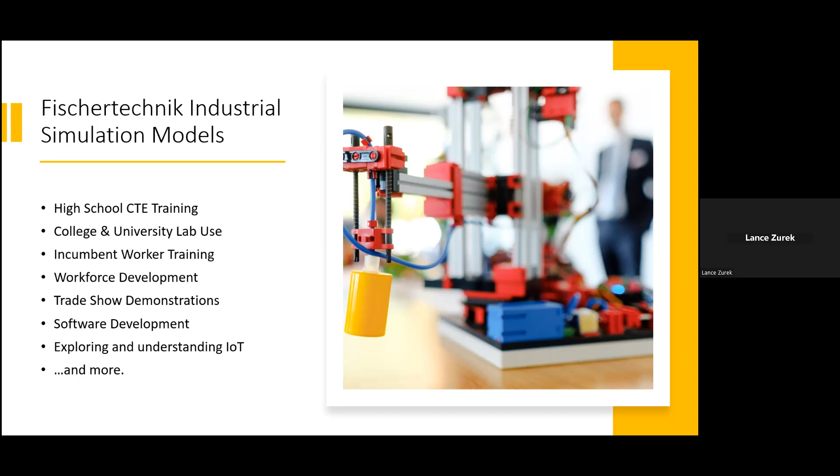And we're going to start off by considering the skills gap. Now, if you've attended any of our other fischertechnik education webinars, you've probably heard me discuss the importance of STEM education. STEM, of course, is an acronym which stands for science, technology, engineering, and mathematics. And at this point, it should really go without saying that STEM education has been perhaps the most discussed topic in education over the last decade.

Now, as most of us are aware, the push for developing STEM skills in students is in large part to help best prepare them to take their place in the modern workforce. Not so long ago, when our parents or even our grandparents were entering the workforce, employers in areas such as manufacturing might have been satisfied with hiring workers who could demonstrate good motor skills and a solid work ethic.

But as manufacturing has become more and more dependent upon automated processes and robotic control, employers now desperately need individuals who have a background in areas like mechatronics, industrial electricity, mechanical components, and programming PLCs.

And as it ties in directly with the solutions that we're going to be looking at in this presentation, let's consider that last skill area I just touched upon, that of being a PLC programmer.

Well, first off, for anyone who may not be familiar, let me explain exactly what a PLC is. The term PLC is an acronym, the letters of which stand for Programmable Logic Controller. Essentially, a Programmable Logic Controller, or PLC, is a very specialized computer used to control the types of machines and automated processes that are typically found in an industrial setting, such as an automated manufacturing plant.

Now, as the world of manufacturing becomes increasingly dependent upon these automated control systems, the need for workers skilled in the programming of systems like this grows exponentially.

And to get a pretty clear idea of just how highly prized these kinds of programming skills are, I'm going to give you some salary figures for PLC programmers as quoted from the job search website, Neuvoo.com. Quote, the average PLC programmer's salary in the USA is $78,000 per year or $40 per hour.

Entry-level positions start at $43,924 per year, while most experienced workers make up to $132,600 per year, end quote.

Now, at the time that I was preparing the original version of this webinar, I took a look at the listing of current job openings for PLC programmers on Neuvoo.com, and this was back in 2020. The listings at that time showed 15 different positions being advertised with salaries of over $75,000, and two of which even listed salaries of $195,000 per year.

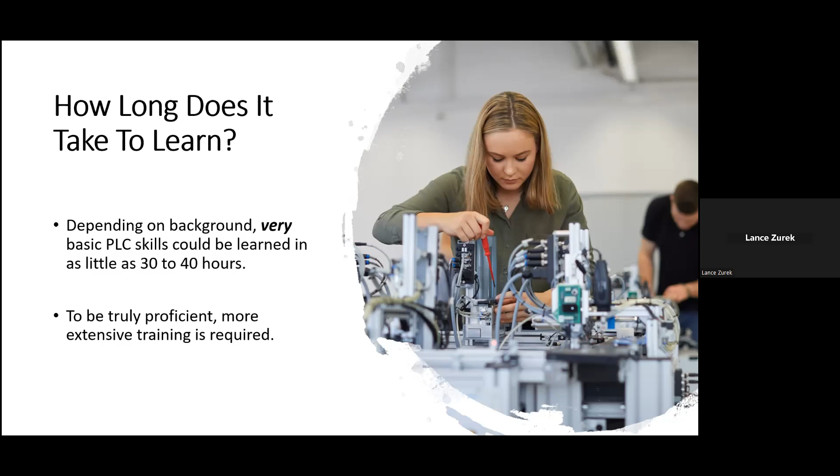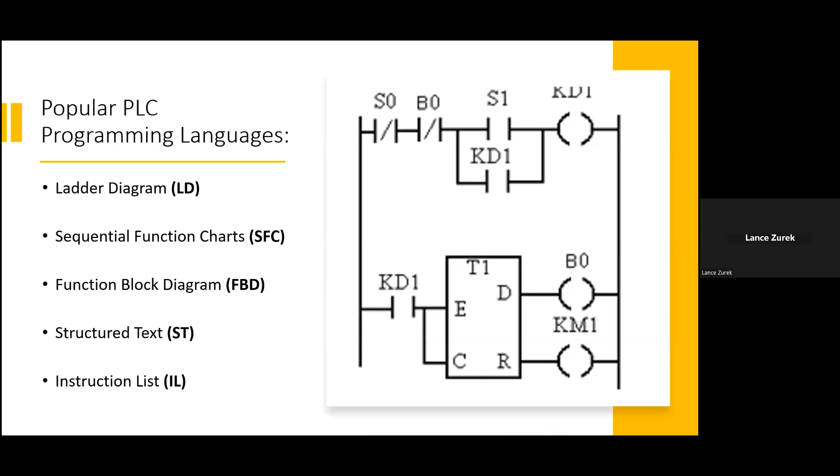But of course, to become truly proficient in all 5 of the most widely used PLC programming languages, which you see listed on the screen right now, as well as learning how to efficiently troubleshoot and address errors in judgment and equipment breakdowns, more training, of course, would be required.

Now, once again, while many students can learn PLC programming skills in a college lab setting, there are, of course, many other options available, things like high school CTE, career and technical education training programs. There's also adult continuing ed programs, vocational training, technical training and trade schools, and employer-sponsored incumbent worker training programs.

Now, that all being said, the question that still arises for the educator, whether you're in the university or the vocational school setting, is how do you teach PLC programming in a way that makes it engaging and relevant to the student, whatever their background?

How do you get away from the dryness of textbooks and video presentations and instead make it realistic and hands on? But there are other areas of focus beyond programming that also need solutions for demonstrating, exploring, and understanding different aspects of automation and control systems.

Now, it could be that it's a company involved in creating or marketing a new type of software based solution that's looking for ways to make more tangible processes which might otherwise be perceived as abstract, or to test it out in a more realistic fashion. Maybe it's a manufacturer looking for ways to better visualize the production process for workers or stakeholders as they prepare to build a new factory. Or it could even be a company looking for an engaging way to demonstrate their services or solutions in a public setting, such as a trade show.

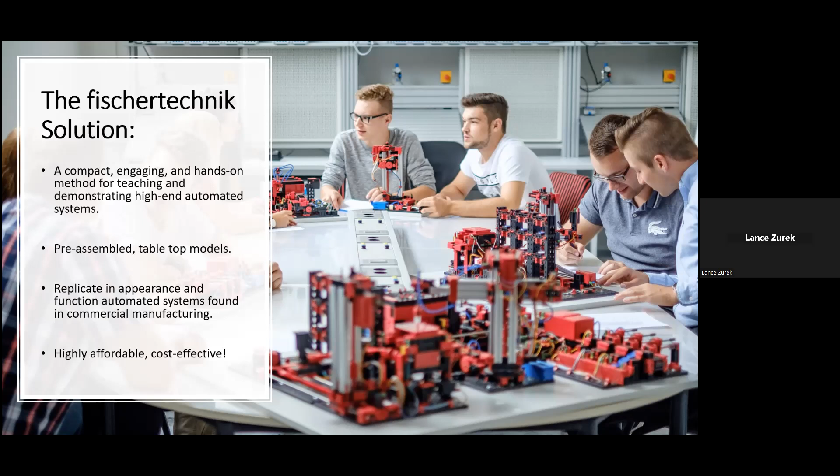The line consists of a series of pre-assembled small scale models which are designed to replicate in both appearance and in function various automated robotic machines and systems commonly used in commercial manufacturing. But before we begin to look at each of these models, I'm going to provide you with a little bit of a background on fischertechnik.

Fischertechnik has been creating tools for teaching students of all ages how technology works for over 50 years, all based around their unique building system. Now, what makes this system unique is that unlike other popular construction systems where the components are designed to simply stack, with the fischertechnik system, it was created with more of an engineering mindset.

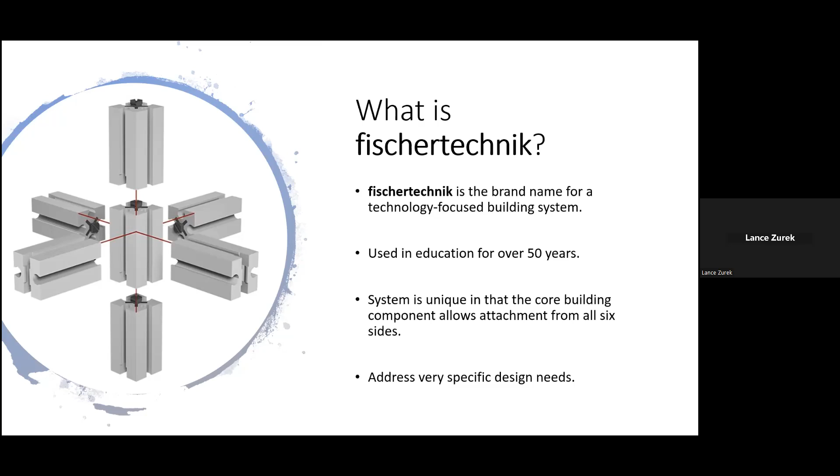The core building block in this fischertechnik system is designed to enable attachment from all six sides, like you see in the graphic on the screen. And because of this, it allows for almost limitless design possibilities. Many of the parts are designed to slide together and lock in place using a tongue and groove assembly method. And the hundreds of different parts available will also help to address very specific design needs.

Now, besides fischertechnik, Mr. Fischer was the inventor of synchronized flash photography, and this was back in 1949. And he was also the creator of the expanding nylon wall plug, which is commonly used in conjunction with a screw or a bolt to help anchor heavy objects to walls.

His company, the Fischer Group, employs thousands of workers worldwide, producing many variations of fastening devices used in building construction. They also produce numerous components used in automobile assembly, as well as providing consulting services to companies who wish to employ state-of-the-art manufacturing processes. Now, once again, the focus of fischertechnik sets, and that's whether we're talking about those sets intended for retail market or those used for the classroom.

The focus of these sets has always been on helping people to understand how technology works. Many of the products offered by fischertechnik for the education sector are what we would refer to as subject-specific sets, for example, focusing on different STEM-related areas such as mechanics or pneumatics, robotics, renewable energy, or what have you.

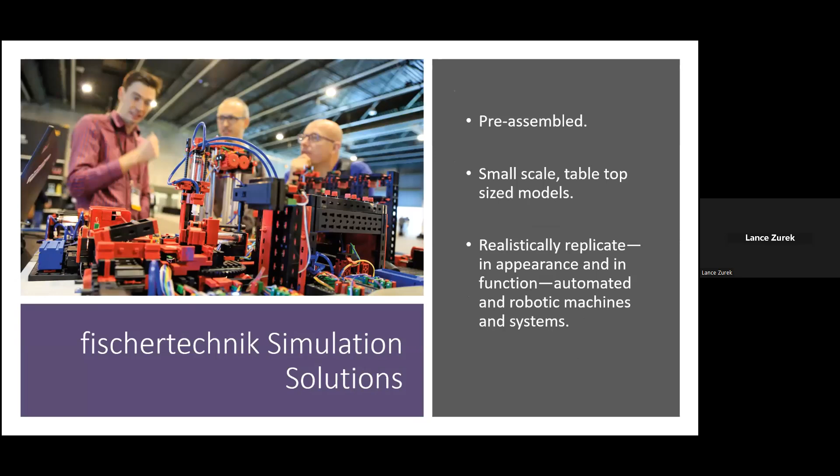Now, the line of fischertechnik simulation solutions, which of course are the focus of today's presentation, are something much different. The line consists not of kits, but again, of a series of pre-assembled small-scale models which replicate in appearance and

function various automated robotic machines and systems. Some of the models that you will find in the fischertechnik simulation line include things like conveyor belts, punching machines, three-axis pick-and-place robotic arms, color sorting lines, and even Highbay warehouse storage systems. Now, besides these individual models, which focus on specific automated processes, fischertechnik also offers an integrated factory simulation model.

Now, this model consists of 4 individual workstations. In this case, it's going to be a vacuum gripper robot, a high-bay storage warehouse, a multi-processing station with an oven, and a sorting line with color detection, which are designed to all work together as one self-contained material cycle. And of course, we're going to look at that a little bit later.

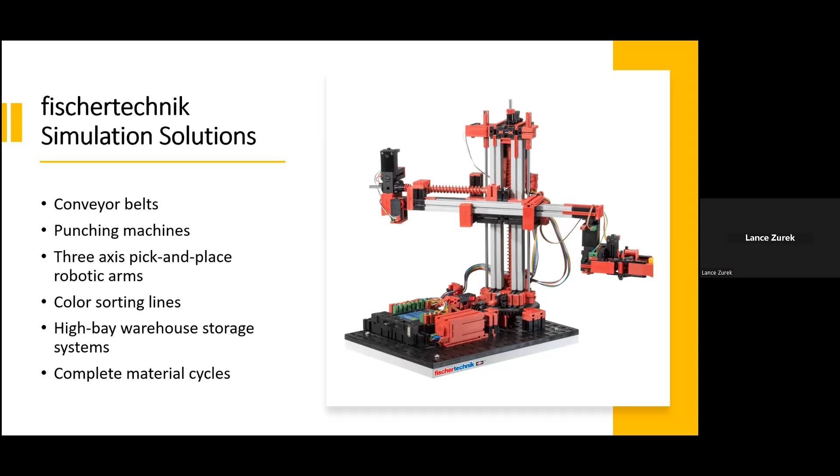Now, before we begin to look at the models in the simulation line in detail, I'm going to very briefly outline some of the advantages of using fischertechnik solutions. Now, I do apologize in advance, as a few of these things are points I've touched upon before, but in each case, I do think it's worth repeating.

First, fischertechnik simulation solutions allow educators to offer engaging, hands-on tools for teaching, exploring, and understanding various aspects of automation and programming. Now, this can be for understanding how automated systems work, or for having a tangible physical system to observe and work with in a programming or PLC-focused learning environment.

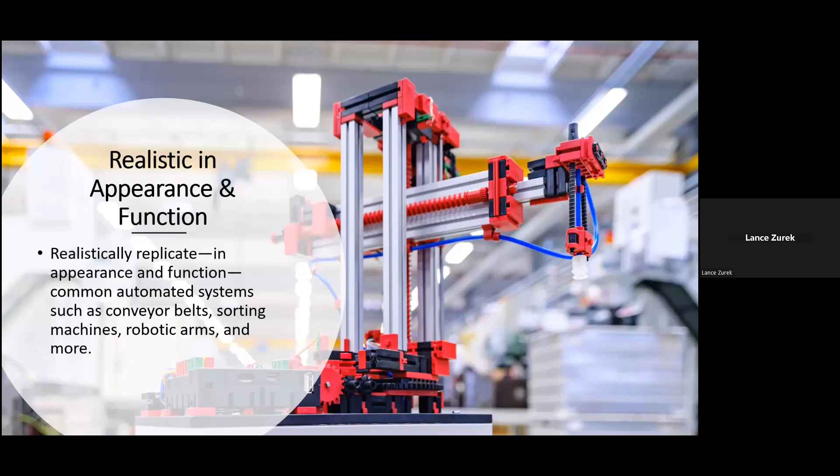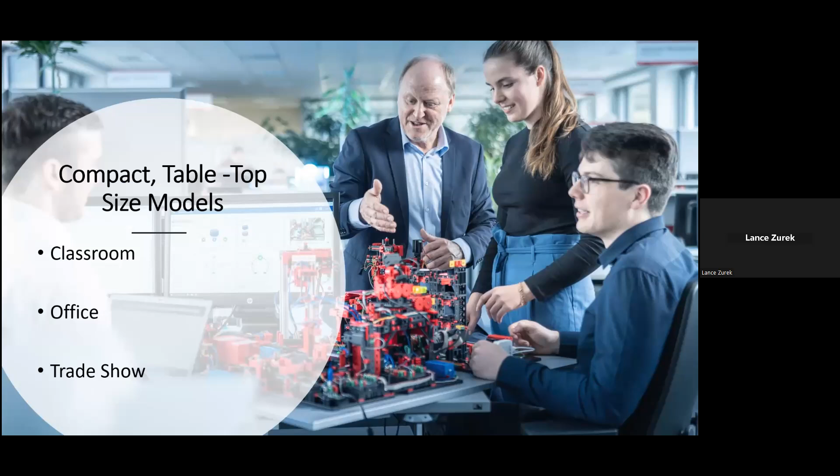The models are once again designed to realistically replicate, again in both appearance and in function, common automated systems, things such as conveyor belts, sorting machines, robotic arms, and much more. Because the models are compact and in most cases tabletop size, they are not only ideal for use in the classroom or in office demonstrations, but also for demonstrating software or other technology-based offerings in a trade show environment.

The next aspect is quality. Each fischertechnik simulation model is a hand-assembled, high-quality German-made product. Each of these models is available in a 24-volt version designed for use with industry-standard PLCs.

Now, it doesn't matter whether you prefer to use Allen Bradley controllers, Siemens controllers, or controllers from manufacturers such as Honeywell, Mitsubishi, General Electric. Of course, there are many others. In any of these cases, you can control these 24-volt versions of the models with the PLC you prefer.

Of course, this shouldn't be an issue, as these models are designed specifically for industrial users or for those teaching or exploring industrial processes involving PLC programming. I will say in advance, there are a couple options that do include some wiring and PLC, which we will discuss later in the presentation. But most of them will require that you provide that on your own.

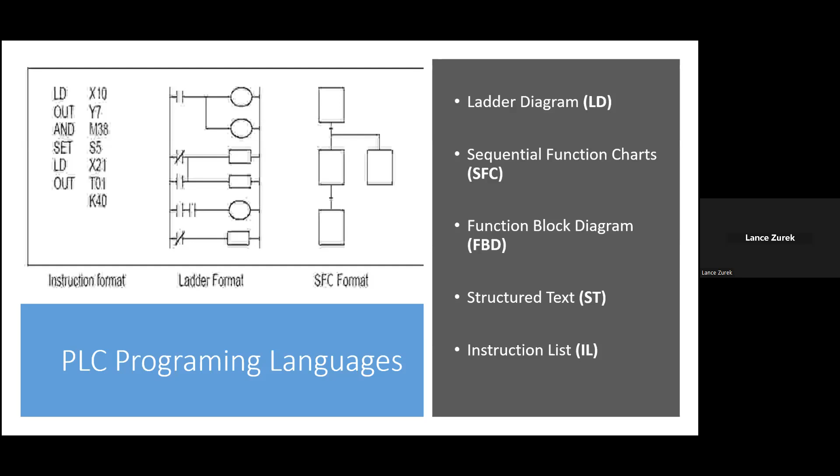Moving right along. In addition, for non-industrial users, or for those educators who aren't versed in or familiar with PLC programming, there are several models which are currently available in 9-volt versions. Now, these 9-volt versions ship pre-wired to fischertechnik's own proprietary robotic controller, which is called the Robotics TXT controller.

And each of these controllers is pre-programmed using fischertechnik's own RoboPro programming software. Now, with these 9-volt models, the only additional component required will be some power adapters, which we will mention as we get into each model. Otherwise, in most cases, these 9-volt models are essentially ready to use out of the box.

Moving along with our advantages. Now, if you're involved in demonstrating or exploring IoT, of course, which is also known as the Internet of Things, besides the fact that many end users we work with have adapted many of the models in the primary line of simulation and training solutions for IoT purposes, besides this, fischertechnik now also offers a special IoT-focused variation of the

factory simulation, which is designed specifically for exploring and understanding cloud-based control and what is often referred to as Factory 4.0. Now, in the case of these models, the model is designed to be both controlled and monitored from a special web-based dashboard. And of course, we're also going to discuss this in more detail in just a little bit.

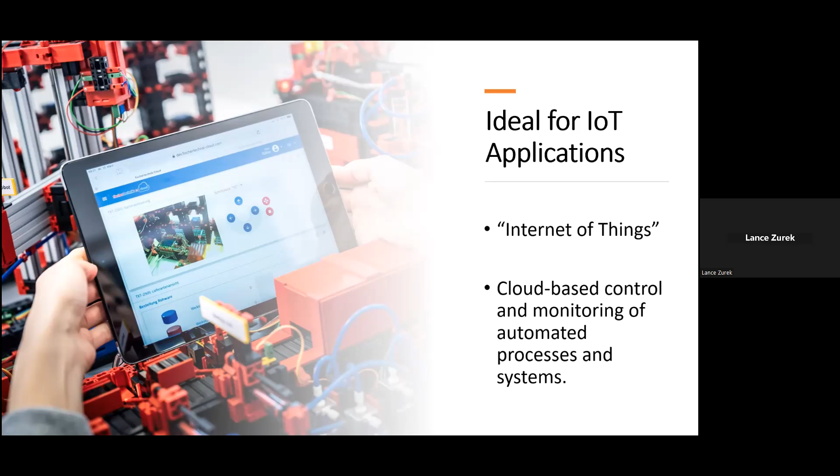Finally, fischertechnik simulation models are cost effective. Now, if you've had the opportunity to look into any of the other hardware-based industrial simulation options in the marketplace, you'll probably notice that the entry point for many of these products can easily be $30,000, $40,000, even much, much more. Fischertechnik simulation solutions, on the other hand, are available at just a fraction of that price, as well as, again, being compact, realistic, and high-quality learning and demonstration tools.

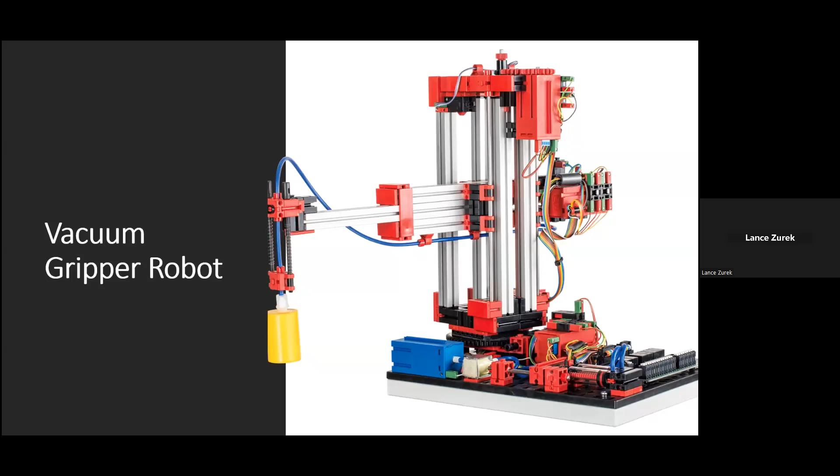So on that note, let's take a look at each of the models which are currently available. The first model we're going to look at is the vacuum gripper robot, which you see on your screen now.

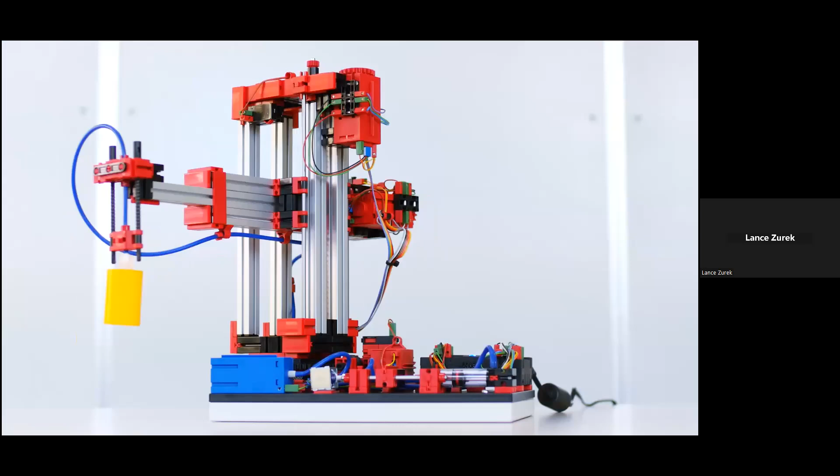Now, as you're going to see in this video, the vacuum gripper is a 3-axis robotic model with a vacuum gripping device. The model is designed to precisely pick up and position workpieces in 3-dimensional space. The model itself includes 3 encoder motors, 3 push-button limit switches, a vacuum suction device, a compressor, and a solenoid valve. The model's dimensions are approximately 9 by 19 by 15 inches, and it has a weight of just about 7 pounds.

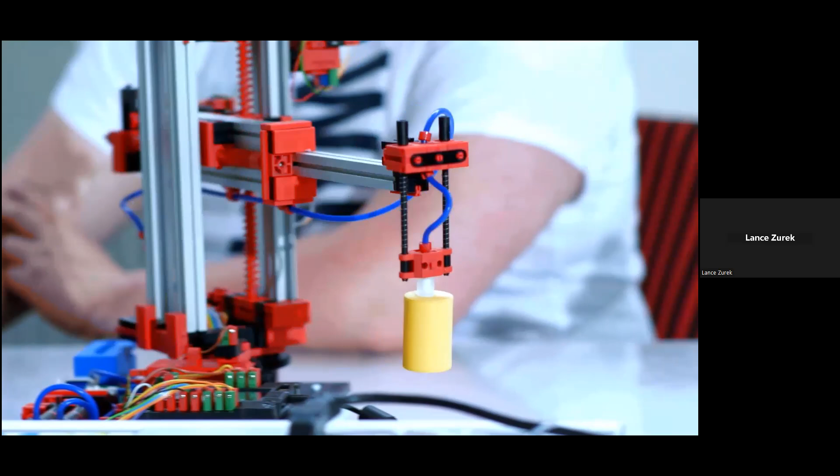The 24-volt version of this model, which is the only version available right now, as well as all of the first 5 24-volt models that we're going to be looking at today, each have a relay board for motor polarity reversal and both a multi-pin connector, which is 34 pins with a grid of 2.54 millimeters, as well as additional PCB terminals with push-in connections for all inputs and outputs. Again, the 24-volt version of this model, as well as all 24-volt versions, will require you, the end user, to provide the PLC and the program.

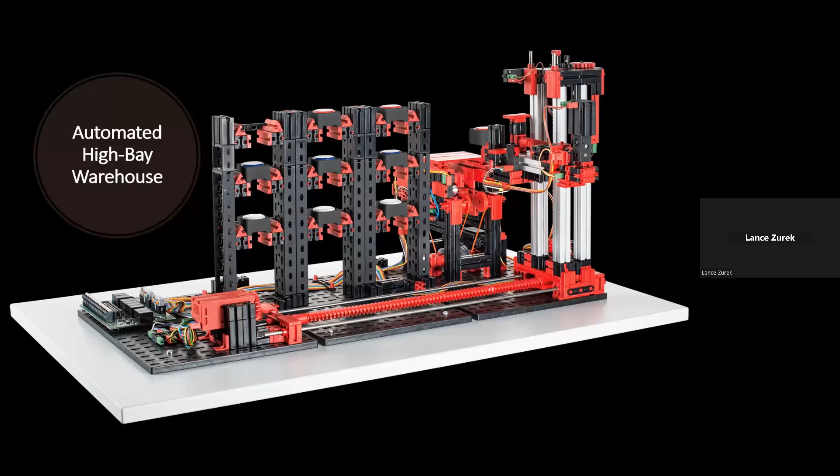And that was the vacuum gripper robot. Next, we're going to look at the automated High-Bay Warehouse.

Now, the model you're going to see in this video features a transfer station with a conveyor belt, along with a shelf stacking mechanism for storing and retrieving workpiece carrier trays, along with 9 individual storage spots. Components on this model include 2 encoder motors, 2 mini motors, 4 push-button limit switches, 2 photo transistors, 2 LED light barriers, along with a selection of different colored workpieces and carrier trays for each piece.

I will mention that this particular model is a favorite among educators that I've spoken with who are involved in teaching PLC programming. The reason for that is because it gives you so much to work with in regards to the precise movements of the picker mechanism, as well as the precision required to properly store and retrieve each of these workpieces, each step of which will require its own very specific coding.

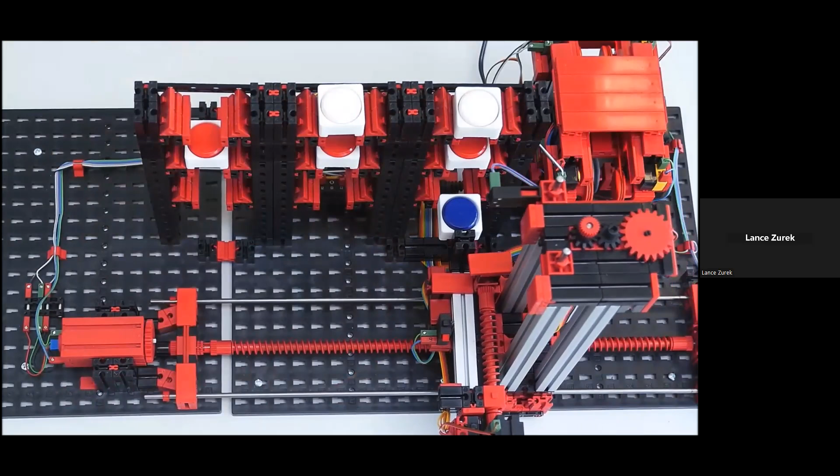Getting back to specs, the dimensions for this model are approximately 19 by 28.5 by 15 inches, and it has a weight of approximately 18 pounds. Again, this 24-volt version has a relay board for motor polarity reversal and both a multi-pin connector, 34 pins with a grid of 2.54 millimeters, as well as additional PCB terminals with push-in connections for all inputs and outputs.

Again, you will need to provide your own PLC and programming, and I will mention that there is a limited edition 9-volt version also available at this time, which is pre-wired to a pre-programmed robotics TXT controller, and in that case, 1 power adapter is required.

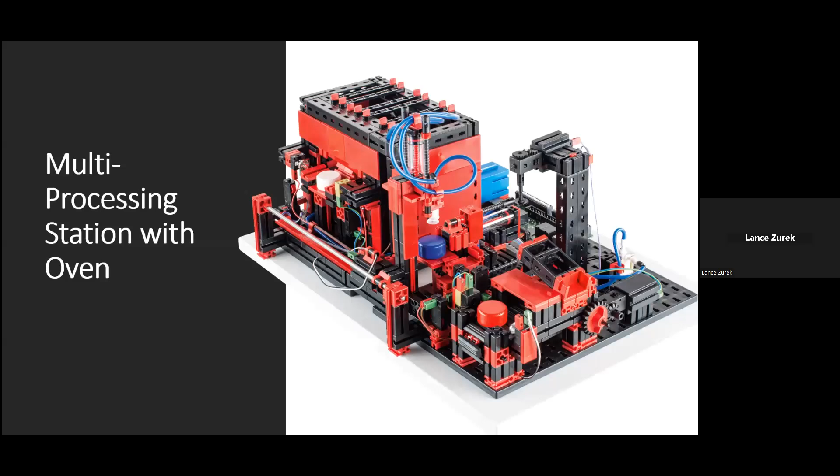The next model we will look at is the Multi-Processing Station with Oven. The model you're going to see here features a furnace simulation with a pneumatic sliding door. There's a downstream processing station with a pneumatic transfer unit that includes a vacuum gripper, a cutter with a rotary table, and a conveyor belt.

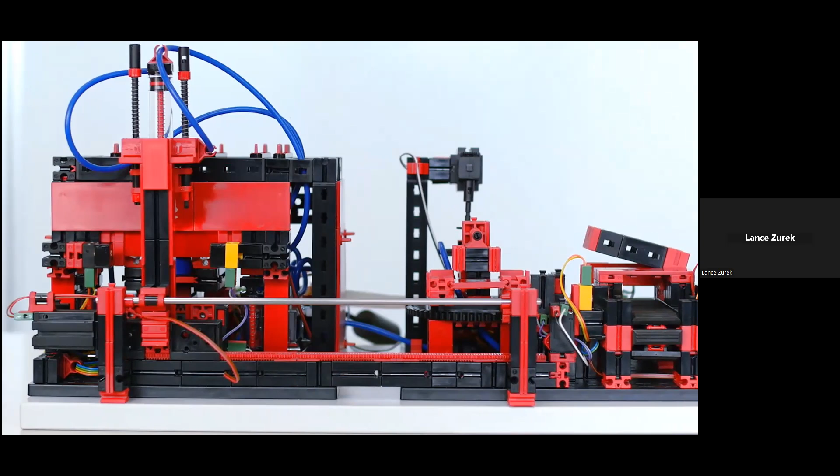Components on this model include 4 mini motors, 6 push-button limit switches, 2 photo transistors, 2 LED light barriers, 4 solenoid valves, and a compressor. The dimensions are approximately 20 by 14 by 12 inches, and it has a weight of just about 11 pounds.

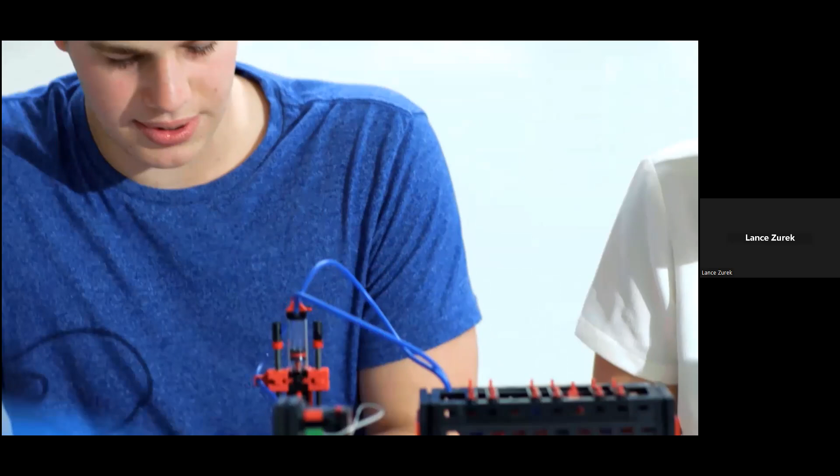Again, the standard version of the model is the 24-volt version for use with the PLC of your choice, with once again a relay board for motor polarity reversal, and both the multi-pin connector, 34 pins with a grid of 2.54 millimeters, as well as additional PCB terminals with push-in connections for all inputs and outputs. There is also a limited edition 9-volt version, which in this case comes connected to 2 robotics TXT controllers, so for this reason, 2 power adapters would be required.

We'll let this just play out for another couple seconds. And there's our payoff.

The next model we're going to look at is the sorting line with color detection. And we'll just turn that off—it always likes to go on.

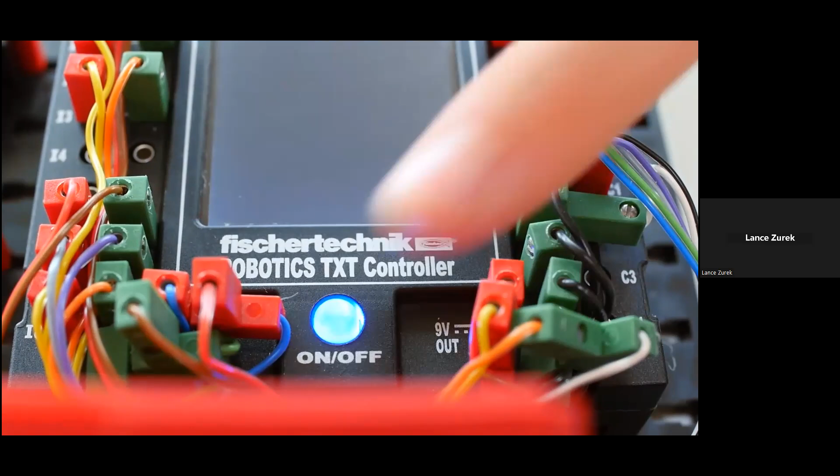This simulation features a system for detecting work pieces of different colors, and it sorts them via conveyor belt into 3 different storage bins. Components on this model include 2 mini motors, 5 phototransistors, 5 LED light barriers, 3 solenoid valves, a compressor, and an optical color sensor.

The dimensions for this model are approximately 20 by 14 by 12 inches, and it has a weight of just about 10 pounds. As with the models we've looked at earlier, the standard 24-volt version has a relay board for motor polarity reversal, and both the multi-pin connector—34 pins with a grid of 2.54 millimeters—as well as additional PCB terminals with push-in connections for all inputs and outputs.

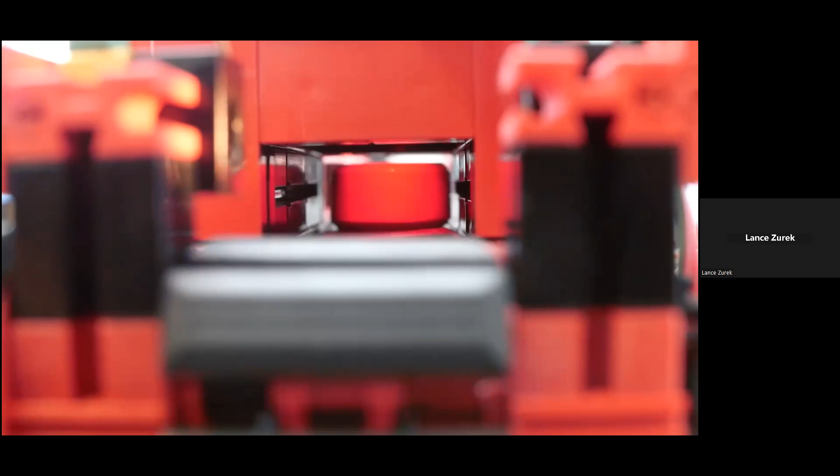Again, you do need to provide the PLC and the program. And there is a limited edition 9-volt version, which is currently available. It comes pre-wired to a pre-programmed TXT controller, and one 120-volt power adapter is required with that.

The next model we're going to look at is the factory simulation. This combines the 4 models we've just reviewed: the vacuum gripper robot, the automated High-Bay Warehouse, the multi-processing station with the oven, and the sorting line with color detection. It combines them all into one self-contained material cycle.

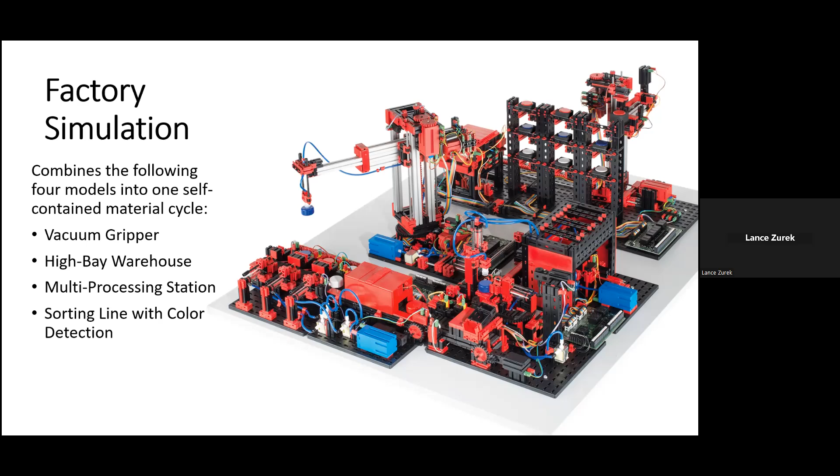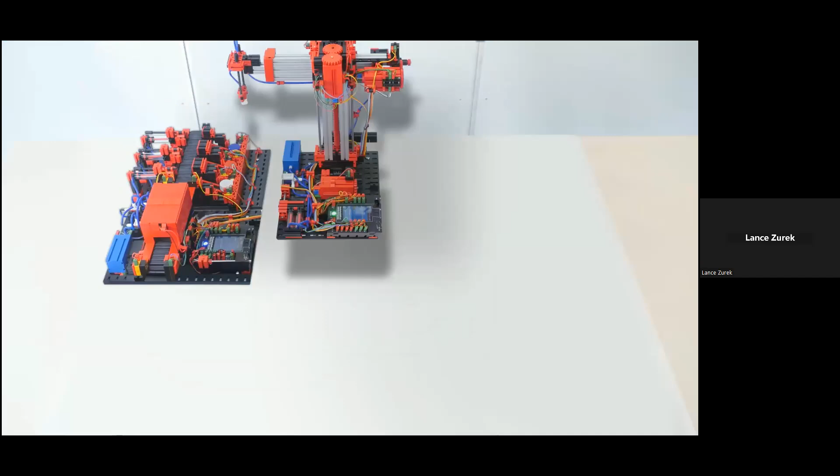The cycle works like this: work pieces are retrieved from the automated High-Bay Warehouse using the vacuum gripper robot, then moved to the multi-processing station with the oven. After the workpiece has been processed there, it's sorted by color in the sorting line with color detection, before again being moved by the vacuum gripper robot to the automated High-Bay Warehouse for storage once again.

Now, as we've already discussed the components of each of these models previously, I'm not going to belabor it by restating all those here. But what I do want to mention are the dimensions of this model as a whole—as it combines these 4 individual models into one cycle, it has a much larger total footprint.

In this case, it's approximately 39 by 31 by 16 inches, and it has a total weight of between 43 and 46 pounds, depending upon whether we're talking about the 24-volt version or the limited edition 9-volt version, which is still available. Due to these dimensions, and due to the fact that these models all ship pre-assembled, please note that this model will only be shipped flat as freight on a pallet.

I also want to point out that the factory simulation models—and that goes for these or a few that we're going to look at later in the presentation—are all in very high demand. So because of that, I would ask that you please anticipate a possible turnaround time of up to 3 weeks prior to any orders for this model leaving our warehouse.

A few other things to note. First, this is currently available again in the standard 24-volt version, and again in very limited quantities in the 9-volt version. In the instance of the 9-volt version, it's wired to 5 robotics TXT controllers, but because of the way that some of the controllers are daisy chained together, it's only going to require 3 120-volt power adapters.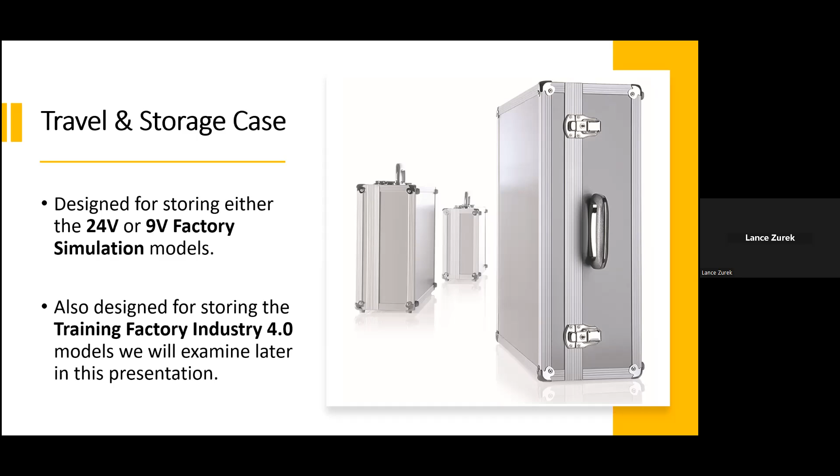The lower portion is lined with hard foam, and it's designed so that once the top of the travel case is removed, the model can remain in the bottom section of the case and be fully functional. The case itself has exterior dimensions of approximately 41 by 33 by 17 inches with a weight of approximately 53 pounds. Please do note that even when using the travel case, these models will still need to be shipped flat.

Moving along, the next model we're going to look at is a very basic conveyor belt. This is a transport belt with a length of 275 millimeters that is used to transport work pieces with a diameter of up to 29 millimeters. Multiple conveyors can easily be connected to increase the length of transport as you may desire.

Components on this model include an XS motor, a push-button limit switch, 2 phototransistors, and 2 LED light barriers. Dimensions of the model are approximately 14 by 10 by 4 inches, with a weight of just about 2 pounds. As before, the standard 24-volt variation includes a multi-pin connector, in this case a 26-pin connector with a 2.54 millimeter grid as shown here. For a limited time, we still offer a 9-volt version pre-wired to the robotics TXT controller, and one 120-volt power adapter is required for use with this one.

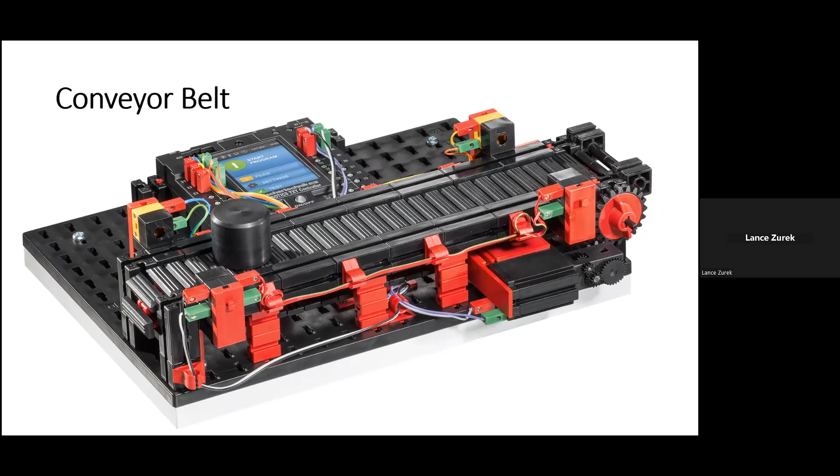The next model is a variation of the conveyor belt, which also includes a punching machine. This features essentially the same conveyor as we just looked at, except this time with the machining station built onto it. Components on this model include 2 XS motors, 2 push-button limit switches, 2 phototransistors, and 2 LED light barriers.

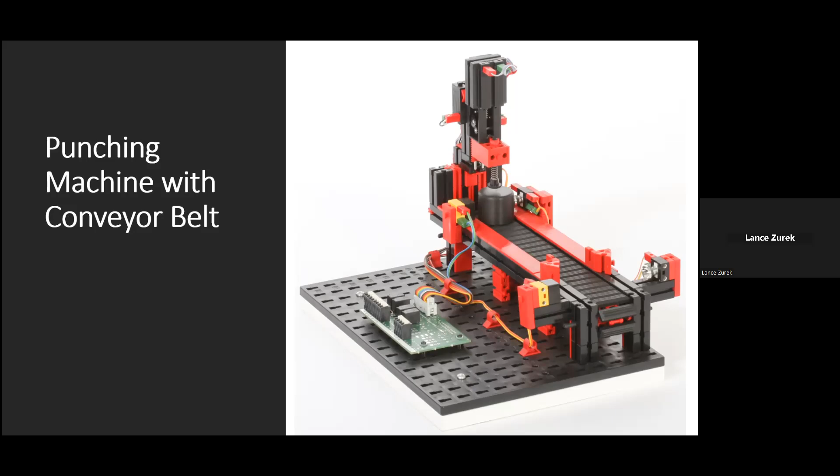Dimensions of the model are approximately 15 by 12 by 7.5 inches, with a weight of just about 3.5 pounds. Again, it's available in the standard 24-volt variation with the 26-pin connector, 2.54 millimeter grid as shown. For a limited time, we are also offering the 9-volt version wired to the robotics TXT controller, and 1 power adapter is required with this.

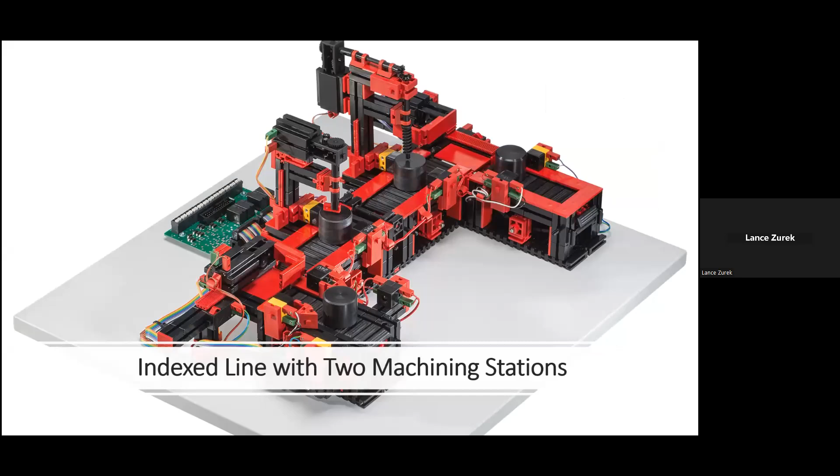The next model is the indexed line with 2 machining stations. This particular model features a U-shaped conveyor line consisting of a milling and a drilling station and 4 conveyor belt sections. Components on this model include the 4 conveyor belts, 8 XS motors, 4 push-button limit switches, 5 phototransistors, and 5 LED light barriers.

The dimensions of the model are approximately 19 by 18 by 11 inches, with a weight of just about 8 pounds. Again, it's available in both the standard 24-volt version with the 26-pin connector and 2.54 millimeter grid for use with the PLC and programming of your choice, and in a limited release 9-volt version wired to the pre-programmed robotics TXT controller, requiring 1 power adapter.

The next model we're going to look at is a variation on the idea of a pick-and-place robot, which is the 3D or 3-axis robot. The 3-axis robot has gripping forceps, which it uses to help it quickly and precisely position the workpieces it picks up in 3-dimensional space. The degrees of freedom for the robot are as follows.

Axis 1 can turn 180 degrees. Axis 2 can move forward or backwards 90 millimeters, and Axis 3 can raise or lower 150 millimeters. Components on this model include 2 XS motors, 2 encoder motors, and 4 push-button limit switches. Dimensions of the model as a whole are approximately 19 by 16 by 9 inches, with a weight of just about 6 pounds.

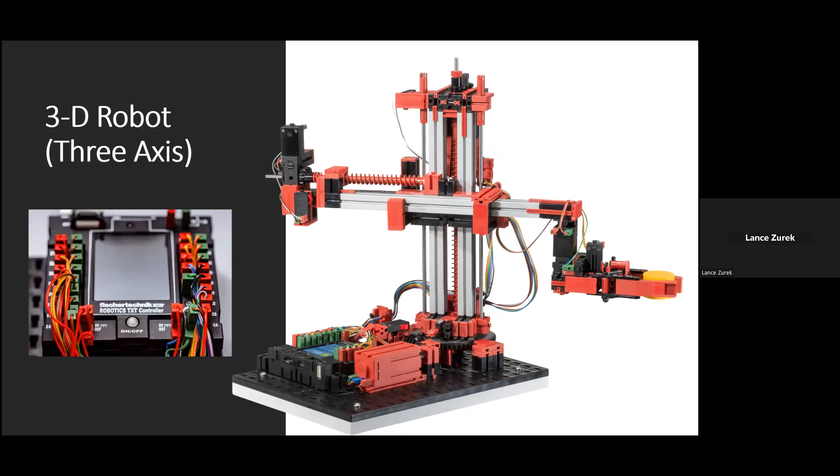Again, it comes in either the 24-volt version with the 26-pin connector and 2.54 millimeter grid, designed for use with PLC and programming of your choice, or in the 9-volt version, which in this case is not a limited availability model, but is a standard model. This comes pre-wired to the pre-programmed robotics TXT controller, and it requires one 120-volt power adapter.

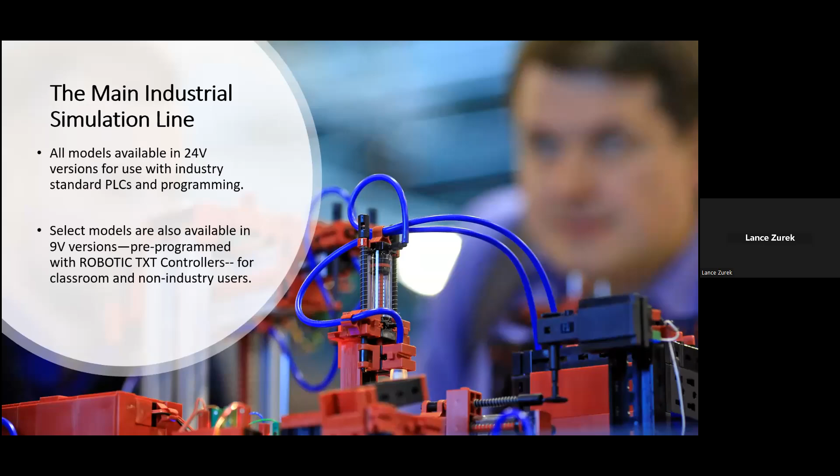That concludes our look at the first 9 variations of simulation models. The next pair of simulation models are designed to focus specifically on the area of IoT and are designed for demonstrating and teaching about cloud-based monitoring and control. These models go by the name of Training Factory Industry 4.0, which are available in both the 24-volt version for use with PLC and also a 9-volt variation for classroom and demonstration purposes.

These models have been designed to help address how the recent changes in industrial production, driven by digitization, have created a need for stronger networking and more relevant information on all production levels. With this Industry 4.0 update of the existing factory simulation model, which we saw earlier, such digitization activities can be simulated, learned, and applied on a small scale before they're implemented on a larger scale.

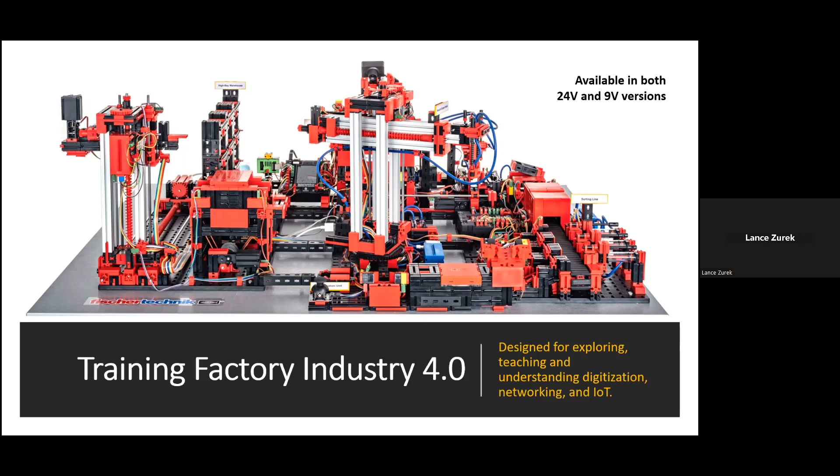As the following video showcasing the 24-volt version of this model provides a nicely narrated overview of just how the factory works, I'm going to step back for a moment and allow you to watch and listen to the narrator.

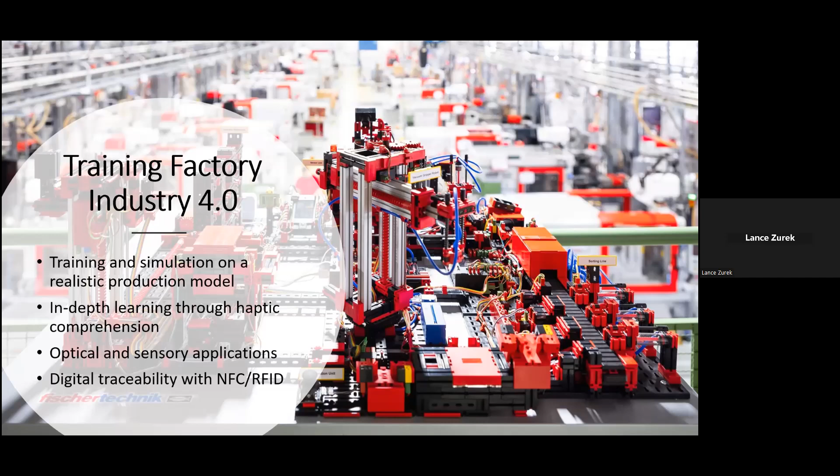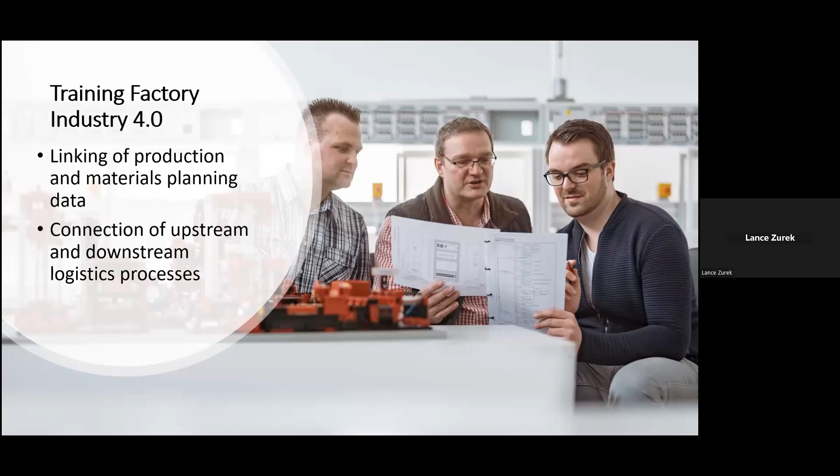First off, the following topics can all be addressed with the fischertechnik Training Factory Industry 4.0: training and simulation on a realistic production model, in-depth learning through haptic comprehension, optical and sensory applications, digital traceability with NFC/RFID technology, customized production in lot size 1, integrated cloud connection and control via smart devices.

Using and operating dashboards, web-based remote maintenance, linking of production and materials planning data, and the connection of upstream and downstream logistics processes. Now, as you just saw, the model incorporates many features not found in the models that we previously discussed, most notably the use of the cloud-based dashboard for monitoring and controlling the model.

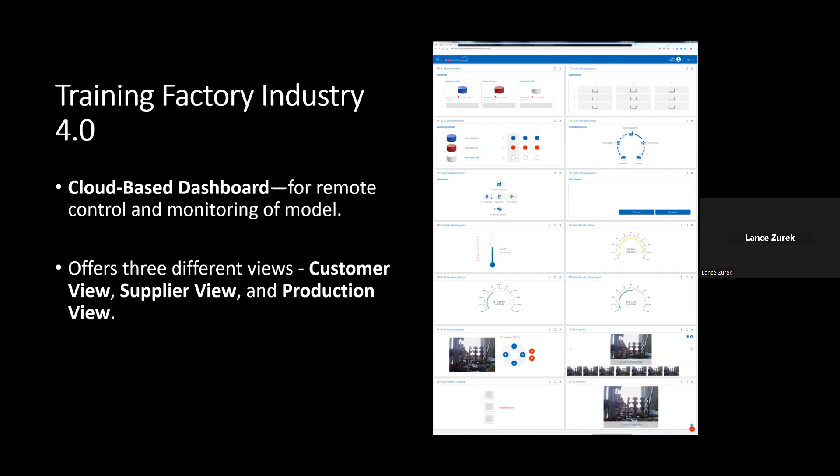Now, some other examples would be the camera that's used for visually monitoring the factory functions from the cloud-based dashboard, and also the environmental sensor, which collects data on variables such as temperature, air quality, humidity, and air pressure.

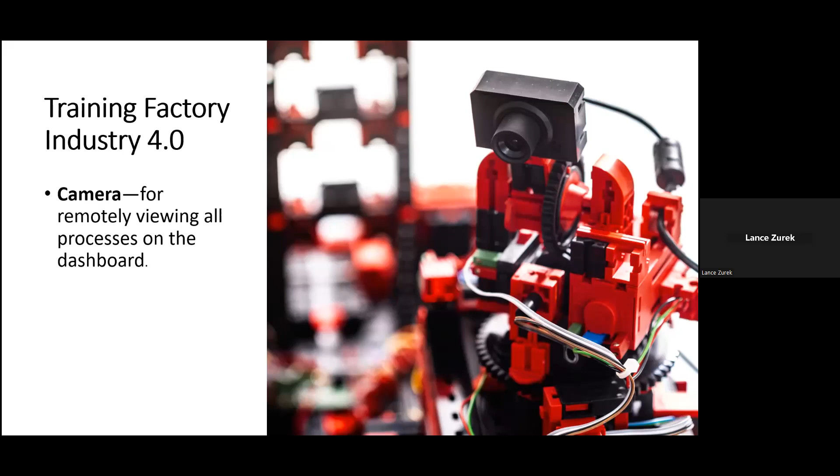The use of NFC chips in each individual workpiece, each of which has a unique identification number, enables the positions of each workpiece in the work cycle to be mapped. And also the use of MQTT, message queuing telemetry transport, that allows the network TXT controllers to communicate with one another. Now, as there are two variations of the model, let's go over what makes them different aside from the voltage requirements.

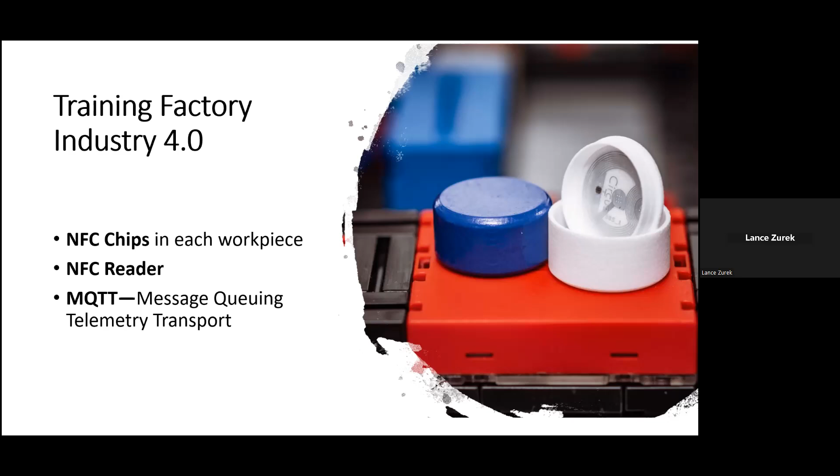And we're going to begin by focusing on the 24-volt version and what makes it unique. First off, it is a bit of a hybrid in that while requiring a PLC for operation and control, it does also incorporate one fischertechnik Robotics TXT controller.

And in this case, the TXT controller serves as the MQTT broker and interface to the fischertechnik cloud-based dashboard. Communication between the PLC and the TXT controller is carried out using an IoT Gateway via OPC UA. OPC UA, also known as OPC Unified Architecture, is of course a standard for exchanging data across different platforms.

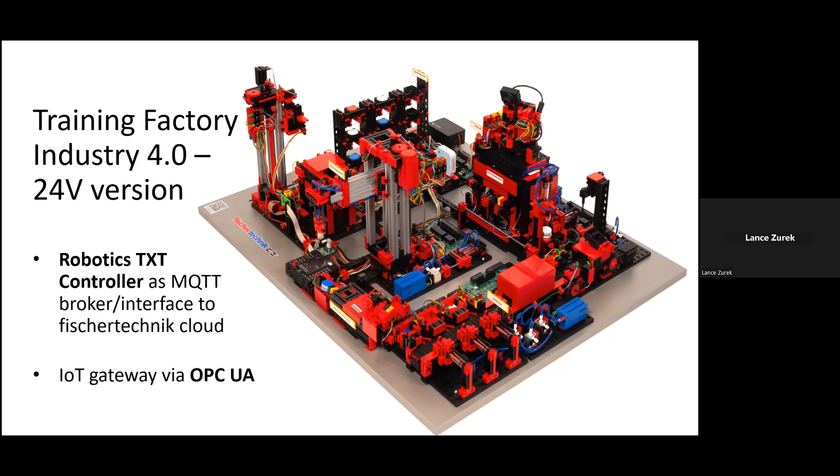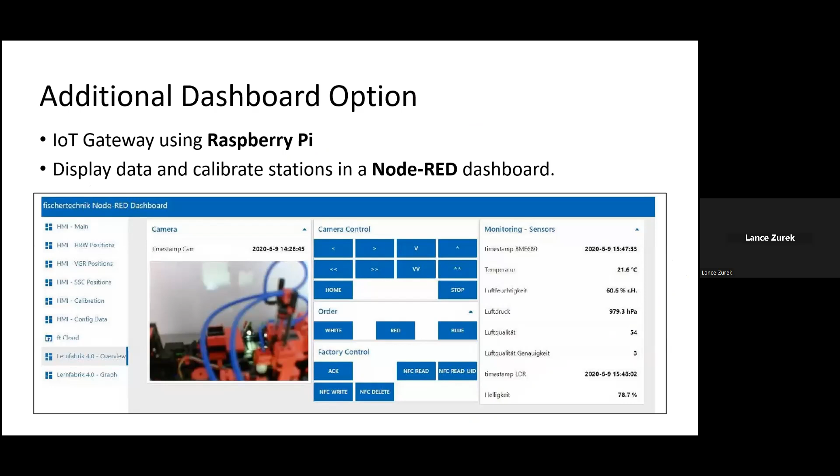Now, in addition to the TXT controller used here, there is also an IoT gateway using Raspberry Pi with Node-RED. And this allows the option for not only presenting and using data on a dashboard in the fischertechnik cloud, but also being able to display data and calibrate the stations of the factory in a Node-RED dashboard.

The model also incorporates newly developed 24-volt adapter boards to interface with the PLC, and these do ship as part of the assembled training factory and are connected to the PLC via terminals.

Now, among other things, the latest generation of adapter boards allows the speed of the encoder motors to be controlled via PWM, or pulse width modulation. And they also have push-pull output stages for photo transistors and for buttons.

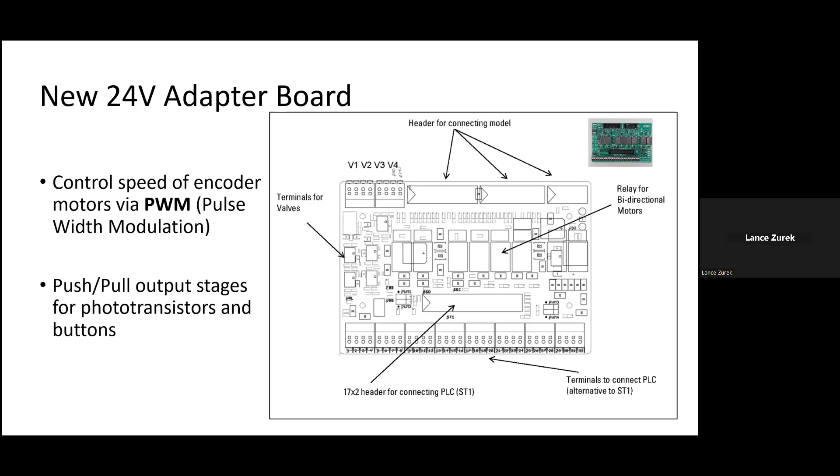Finally, one of the most important new features: unlike any of the previous 24-volt models that we discussed today, the new 24-volt Training Factory Industry 4.0 also includes access to a special sample program.

In this case, the sample program was designed to be in structured text format, ST, and it was created based upon a Siemens S7 1500 PLC. And this is, of course, available for download on GitHub.

Now, as the new training factory can also be controlled with other PLC models and brands, you can easily make some adjustments using the sample program, and source code for all of this is available for download as well from GitHub.

Now, as with the first of the 24-volt models, we looked at the Training Factory Industry 4.0 model has a relay board for motor polarity reversal in both the multi-pin connector, in this case it's the 34 pins with a grid of 2.54 millimeters, along with PCB terminals with push-in connections for all inputs and outputs.

And all of this information and much more is included in the 152-page PDF manual, which can be downloaded from the fischertechnik website, from our own website, or if you'd like a copy, you can email me. I'll give you information on that at the end, and I'd be happy to send you a copy as well.

Now, moving along to the 9-volt version, in this case, the control is facilitated through the use of 6 robotics TXT controllers. Now, unlike all the other 9-volt versions that we looked at today, this one is programmed not using the RoboPro software, but instead using C, C++.

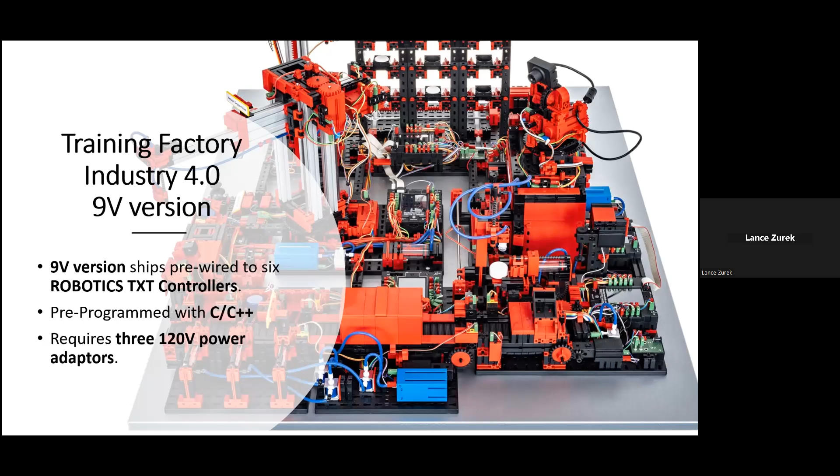The dimensions for these models are approximately 39 by 31 by 16 inches, with a total weight of approximately 51 to 53 pounds, depending on the version. As with the two factory simulation models discussed previously, we recommend the optional travel case to help protect your model during transport or storage.

That is the Training Factory Industry 4.0 model, now available in both 9-volt and 24-volt variations. So, you might be wondering, how much do these models cost? We're going to take a quick review of each option I've discussed, along with the pricing for each.

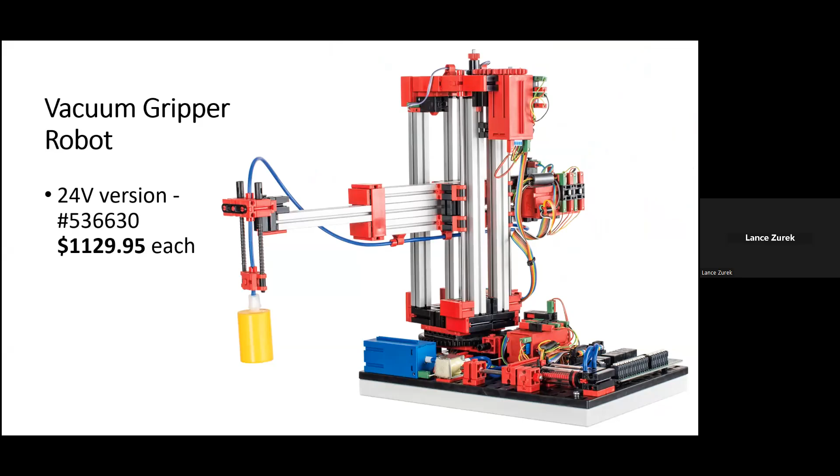First off, the vacuum gripper robot is available in the 24-volt version only, and that is $1,129.95 per unit. The automated Highbay warehouse is available in both versions: the 24-volt version for $1,369.95.

The 9-volt version with the TXT controller is $1,318.95. The multiprocessing station with oven in the 24-volt variation is $1,199.95, and in the 9-volt version with the TXT controller is $1,474.95.

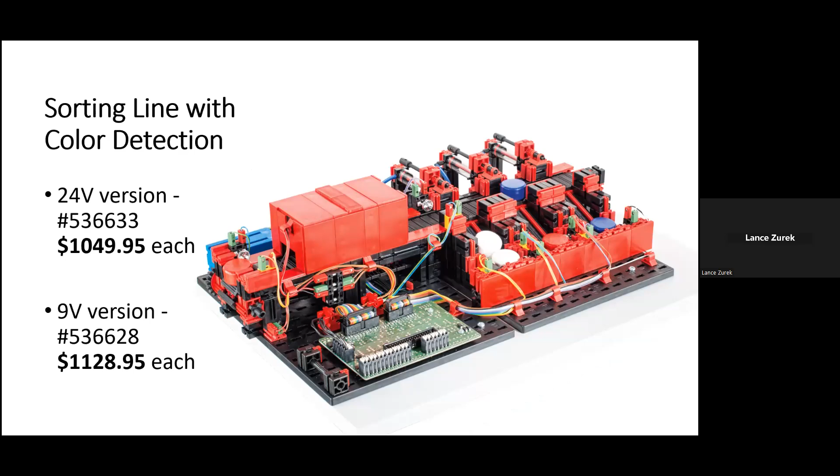The sorting line with color detection in the 24-volt version is $1,049.95, and in the 9-volt version is $1,128.95. The full factory simulation in the 24-volt version is $4,829.95, and the 9-volt version with the TXT controllers is $5,239.

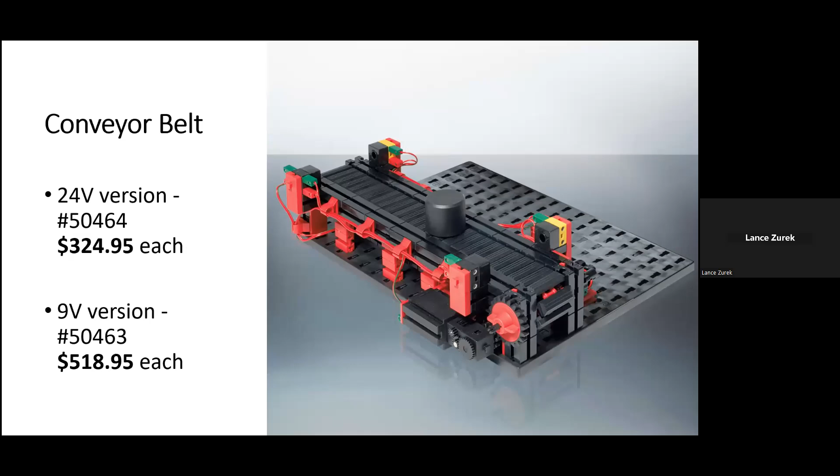The conveyor belt in the 24-volt version is $324.95, and in the 9-volt version is $518.95, again with the TXT controller. The punching machine with conveyor belt in the 24-volt version is $419.95, and in the 9-volt version is...

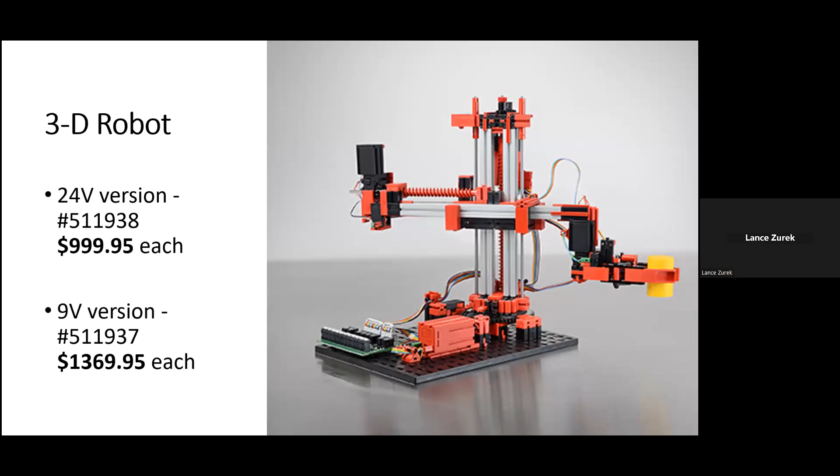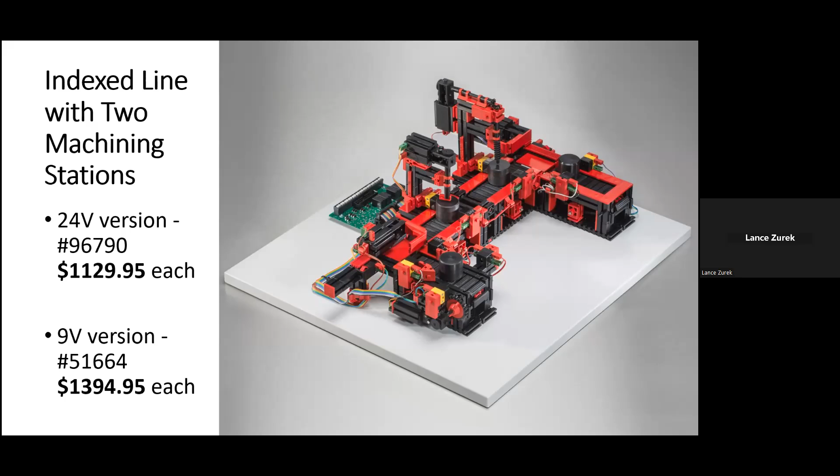$599.95. The 3D 3-axis robot in the 24-volt version is $999.95, and in the 9-volt version is $1,369.95. The indexed line with two machining stations in the 24-volt variation is $1,129.95, and in the 9-volt version is $1,394.95.

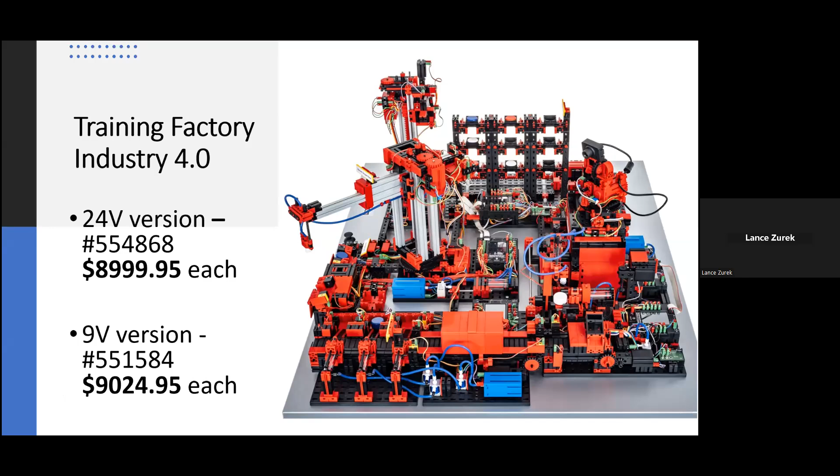As for the Training Factory Industry 4.0, the 24-volt version is $8,999.95, and the 9-volt version with the TXT controllers is $9,024.95. But we also have two new variations of the Training Factory Industry 4.0 24-volt version available, which became available late last year.

There is a version with the PLC connector board, meaning the wiring you would normally have to do for any of these simulation models, from the model itself to the PLC, is all included. That variation costs $12,079.95. Or if you'd like a version that includes that plus the Siemens PLC S7 1500, essentially the full model with wiring, connection board, and PLC, that's also available. If you're looking for the educational version, this is only available to accredited academic institutions.

The pricing for that is $18,499.95, and the commercial version for everyone else is $20,124.95.

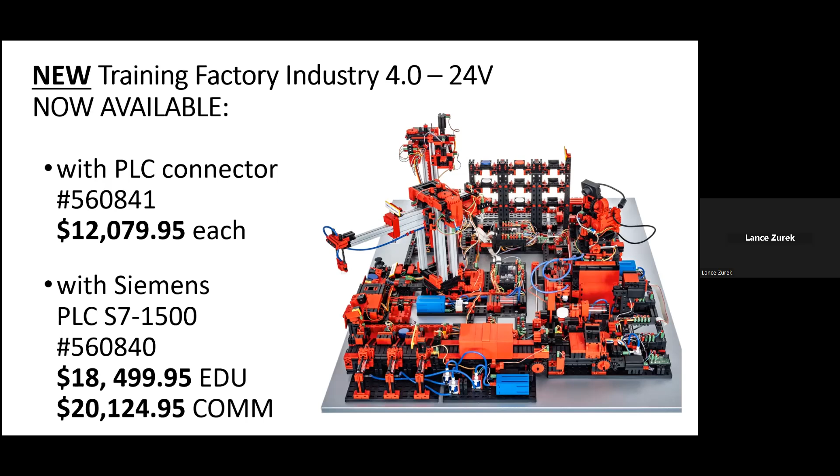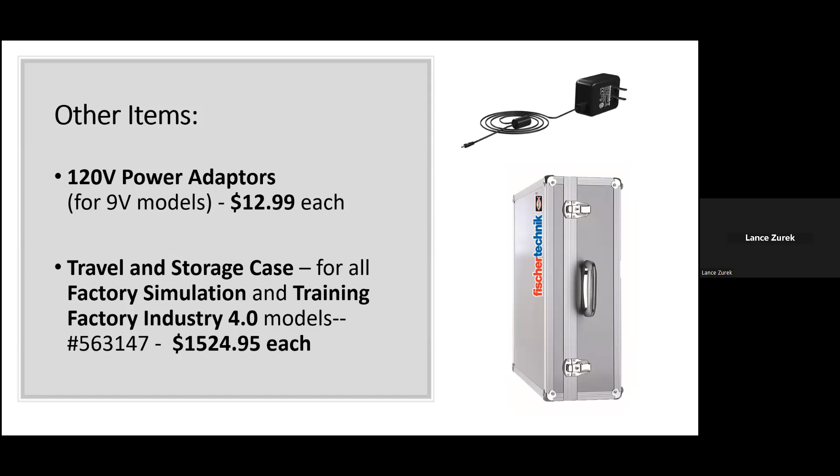Other items I've touched upon: the 120-volt power adapters used with the 9-volt models, and in a couple cases with the 24-volt Training Factory Industry 4.0s to power the TXT controllers I mentioned, are $12.99 each. The travel and storage case, used only for the factory simulation and Training Factory Industry 4.0 models, is $1,524.95 per unit.